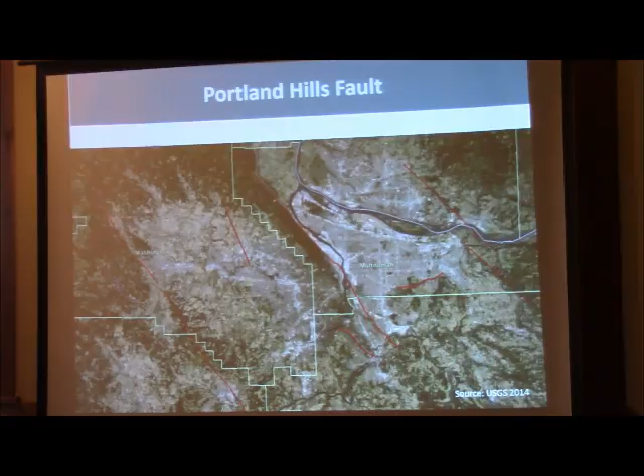But the Cascadia subduction zone earthquake is not the only seismic risk we have here in Portland. Of equal concern to me is the Portland Hills Fault, because it's directly underneath the city center. And while it can't produce a large quake like a magnitude 9, the damage associated with it, because of its proximity to the city center, could be as damaging, if not more, than the Cascadia subduction zone.

So why do we care about unreinforced masonry buildings? Primarily because these buildings were never intended to withstand seismic shaking. They lack the structural connections that enable them to stand up.

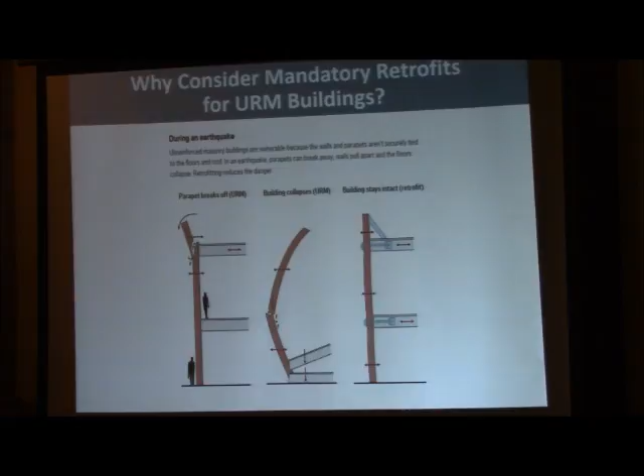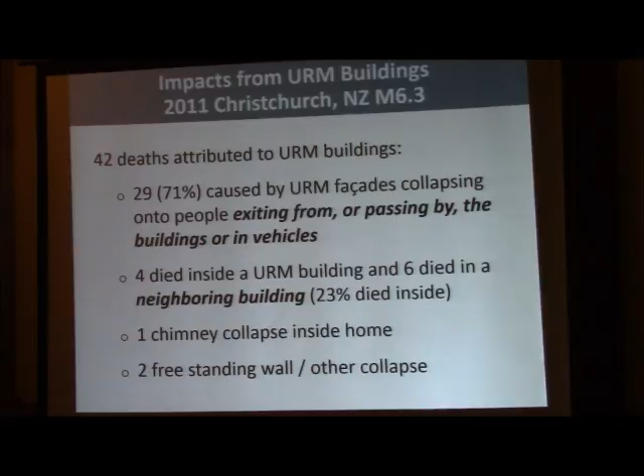In Christchurch, 185 people died as a result of their 6.3 magnitude earthquake back in 2011. But what's really interesting is that of those deaths, 42 were a direct result of unreinforced masonry buildings failing in some way. Of particular note, it was the people outside the building that had more of a chance of dying than the people inside. So 71% of the people who died by URMs were outside the building.

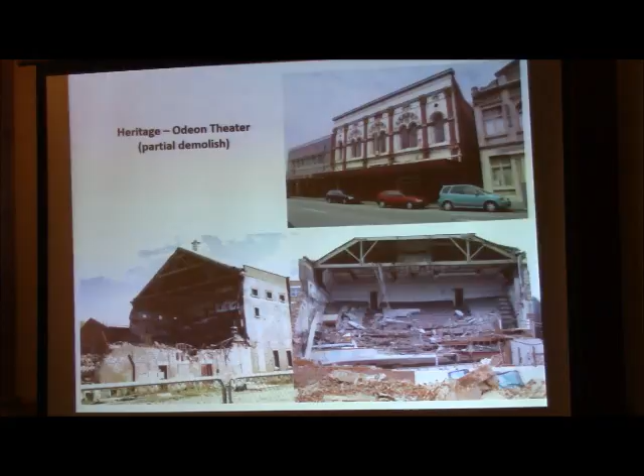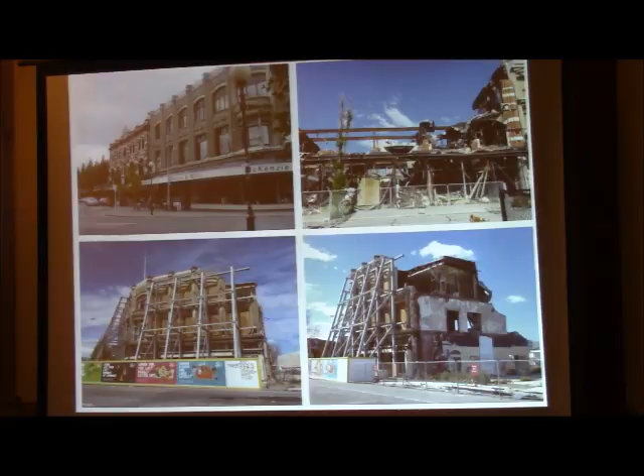This is the Odeon Theater. This is McKenzie and Willis, a large interior design furniture store. You can see this red building actually caught fire after the earthquake. But because the facade was a very grand, ornate facade, they put up this massive scaffolding to brace it against any further damage from subsequent aftershocks.

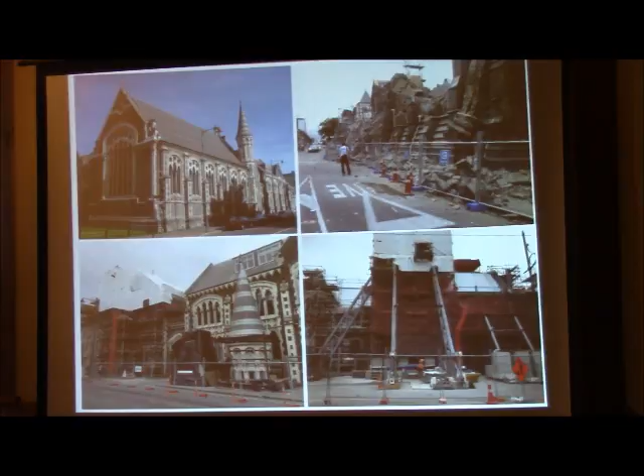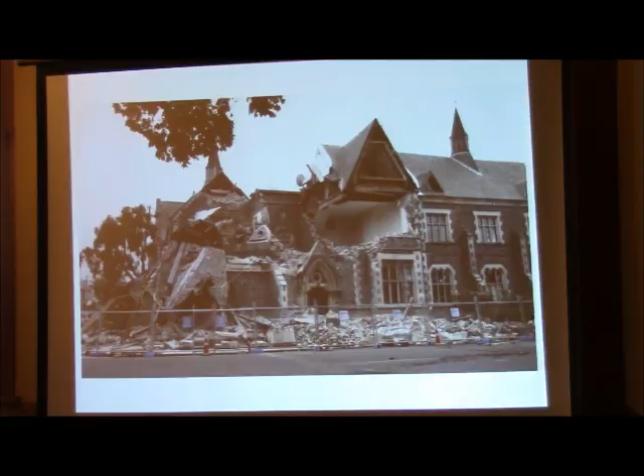This is at the other end of the Art Center of Christchurch. I often use this photo to showcase why you do not run out of a building when the ground is shaking. Notice that the people inside the building would have been just fine—it's the people outside that would have sustained significant damage or injury.

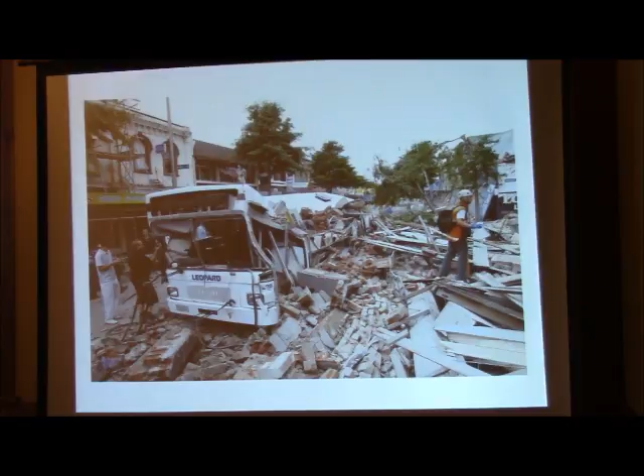This is Colombo Street, a major thoroughfare, kind of like Burnside in Portland. You can see it's literally storefront after storefront of these unreinforced masonry buildings. Imagine trying to get a TriMet bus, an ambulance, a fire truck down this road—it would be practically impossible without clearing the debris first.

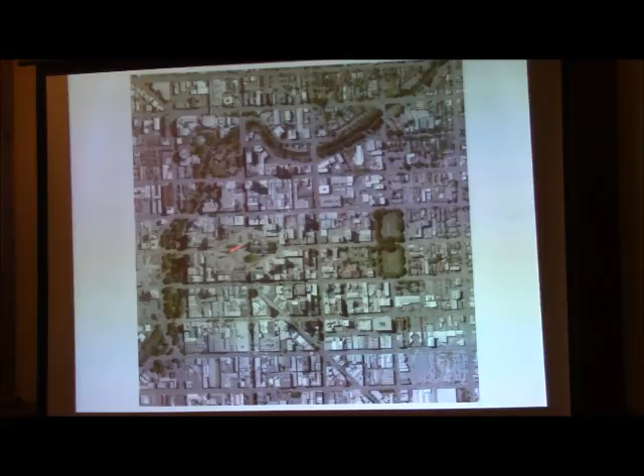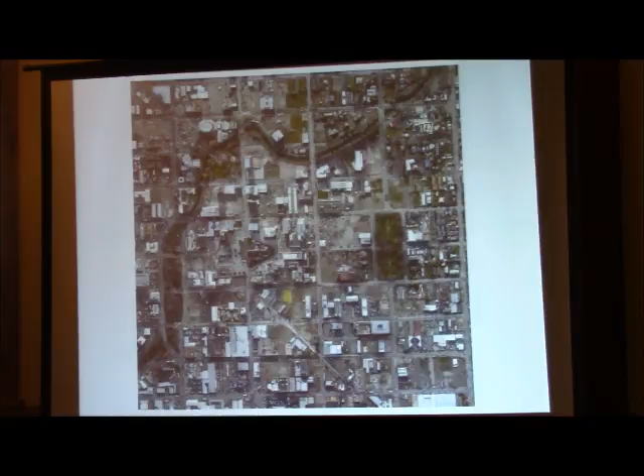So here's before and after, and then one more, and then here's the Christchurch Cathedral, and then after. The problem is that these weren't all unreinforced masonry buildings—the problem is these buildings sustained such heavy damage they had to be demolished anyway.

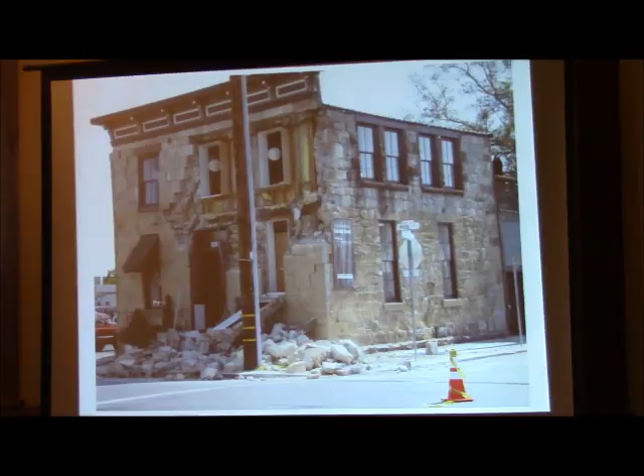So just some more building damage. This is from the Nisqually earthquake in Seattle in 2001. Here's the Napa earthquake in 2014—this is a wine tasting room. And then Oklahoma now has the distinction of being the most seismically active state in the country. This was after their 5.6 quake earlier last year.

But it's not just seismic risk that makes these buildings vulnerable. You might remember we had a pretty significant windstorm back in December of 2014.

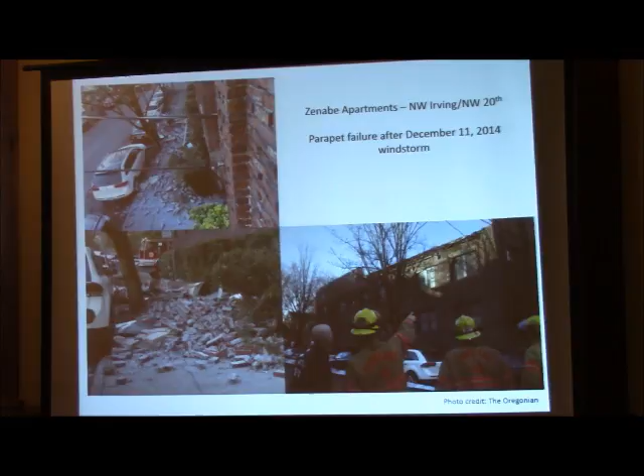This is the Zenabe Apartments in the Alphabet District. You can see here the entire parapet came crashing down, thankfully injuring no one, but it did do some damage to the sidewalk and cars parked nearby.

Other predominantly California cities that have unreinforced masonry buildings have already passed mandatory retrofit laws—some of the bigger ones being Los Angeles, Berkeley, and San Francisco. So in 2014, City Council directed my bureau, Emergency Management, to work with the Bureau of Development Services and the Portland Development Commission to introduce policies to mitigate the risk posed by these buildings.

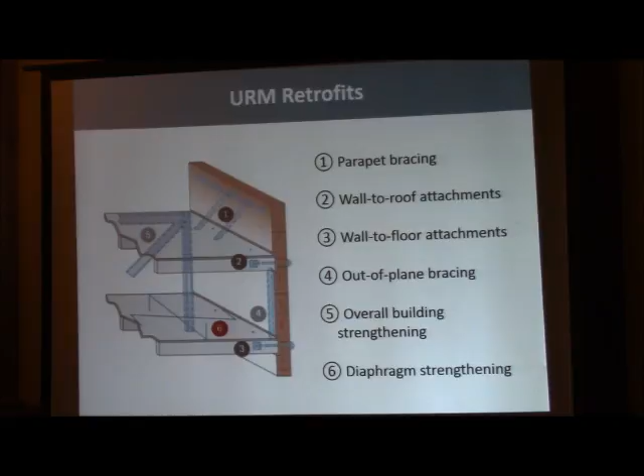And it is possible to retrofit these buildings. You can do very simple things like brace the parapet, tie the wall to the roof, and the wall to the floors. Here we see examples of retrofitted unreinforced masonry buildings.

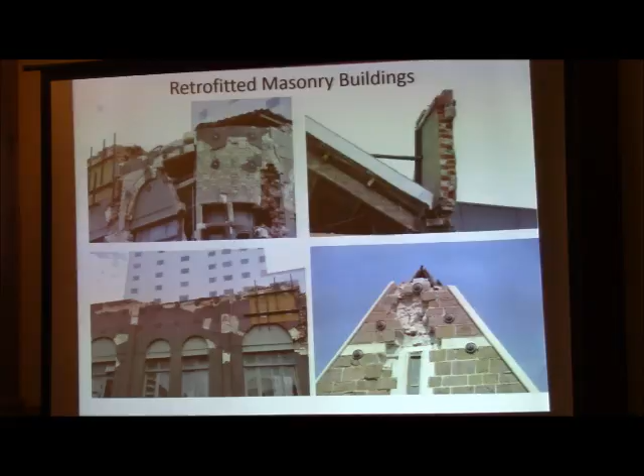These little rosettes are usually telltale signs that the walls have been anchored. You can see here the buildings still sustained some damage, but they did not collapse. When these buildings are retrofitted to almost new building standards, they actually perform quite well.

In fact, these two are electrical substations. Here's a historic church, and that's a historic society. The problem with this external bracing is that it would never pass muster with our historic preservation office, so these kinds of retrofits would not be possible in Oregon.

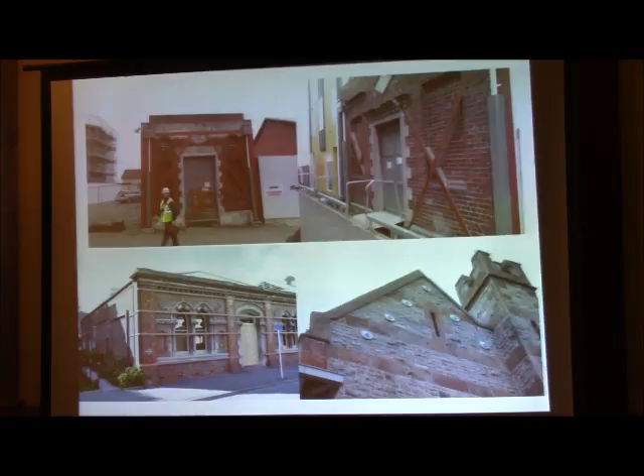Okay, I'm going to go quickly through this part. The first thing we wanted to do was get a handle on the citywide risk. We were using a roughly 30-year-old database done by PSU engineering students through a windshield survey, so we wanted to make sure it was still accurate. We hired an engineer, put them at the Bureau of Development Services, and for over a year worked to update the inventory.

It turns out the database was actually quite accurate. We started off with about 1,866 buildings; 101 were falsely identified, and then we added some we didn't catch the first time. So the entire universe of these buildings is about 1,884. But since that time, 154 have been demolished, and fewer than 280 have had either a partial or full upgrade. At this rate, it would take another 75 to 100 years before we really solved our unreinforced masonry building problem.

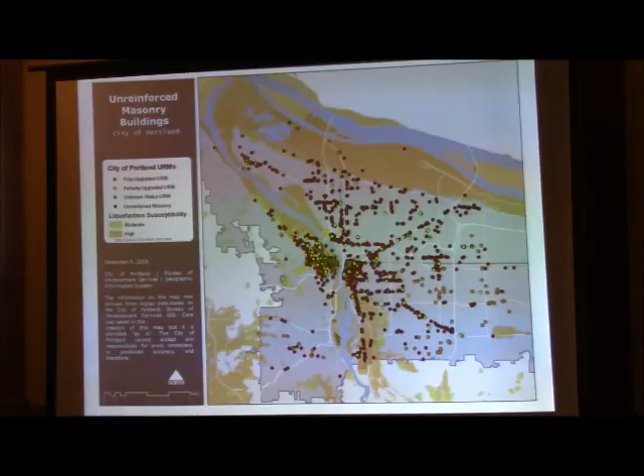Where are these buildings located? They're really all over the city—obviously primarily concentrated in downtown, Old Town, and Chinatown, but they're also all along our major transportation routes: Burnside, Powell, Sandy, Foster. If you think about how the city developed along the streetcar lines, it makes sense. As an emergency planner, what this tells me is that we're going to have a lot of debris to clear from our streets before we can get ambulances and fire trucks back on the road.

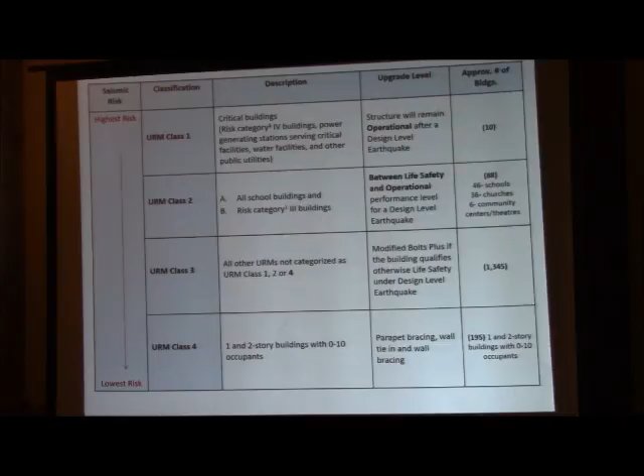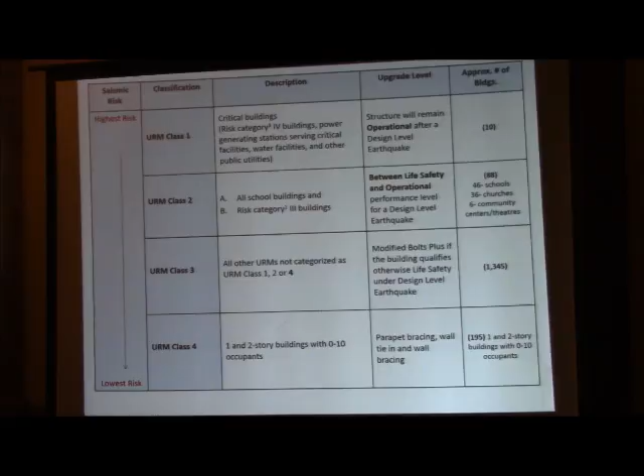At the very top end of the scale, your Class 1 critical facilities, we want an operational performance standard. At the very bottom of the classification, your 1- or 2-story, very low occupancy buildings, we said let's do the bare minimum: brace the parapets and tie the wall to the floor. You'll see here that the majority of the buildings are Class 3.

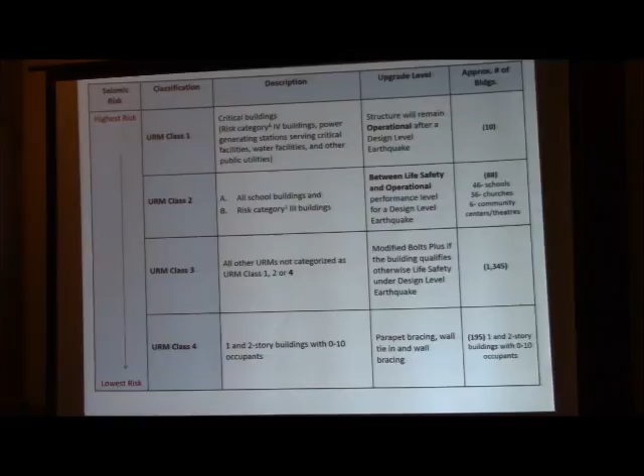For this performance standard, we're using what's called a modified Bolts Plus. It's a standard that was actually developed in San Francisco, and it's a little bit short of life safety, but it's, I think, the best we can do for now.

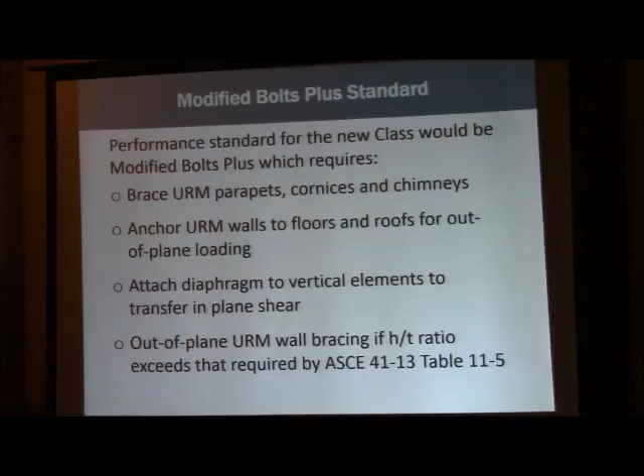We assigned a timeline for these retrofits. For step 1, all buildings have to have an ASCE 41 assessment done, in most cases within 3 to 5 years. Then we wanted intermediate milestones, so within 10 years you have to brace the parapets and tie the wall to the floor, and then in some cases you've got 25, potentially up to 30 years to do the full seismic retrofit.

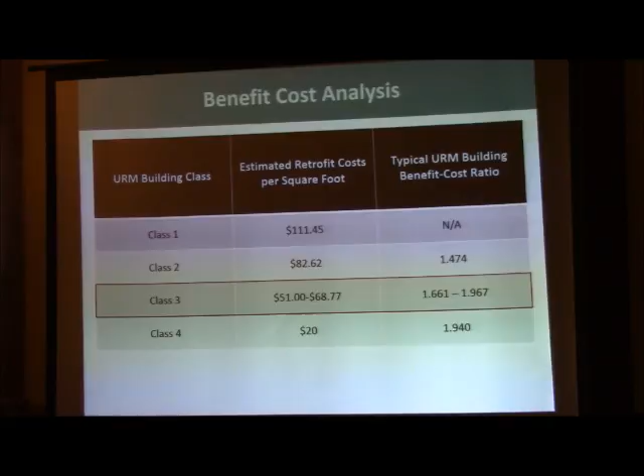We hired a nationally recognized expert to do a benefit-cost analysis for us, and the BCA ratio was actually quite good. Life safety, of course, is the predominant reason, and for every dollar you spend, you're going to get close to $2 in savings afterward.

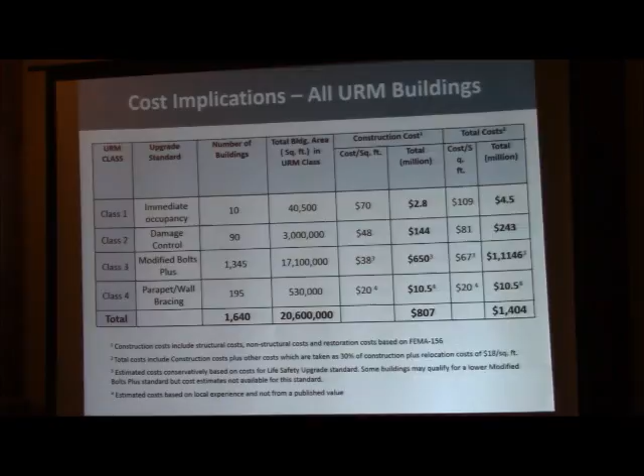I'm going quickly because I think I'm almost over my time. These retrofits are not cheap, and cost has certainly been the biggest concern we've heard from property owners. If we were to do the retrofits for all 1,640 buildings remaining, it'd be in the neighborhood of about $1.4 billion—not an insignificant amount of money. And of course, the city is also an owner of some of these buildings, including the Parks Bureau.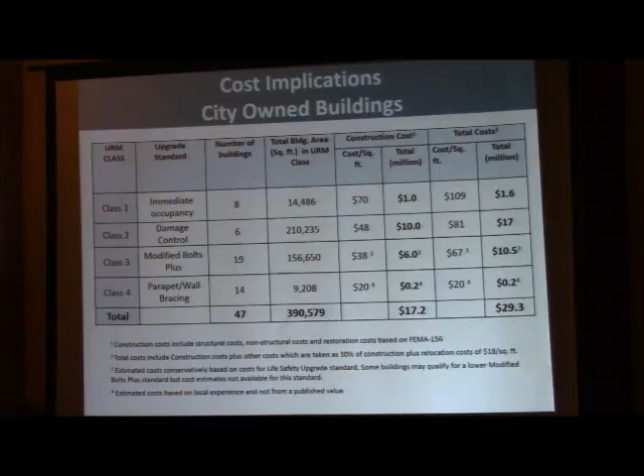So we are obviously going to have to do our own seismic retrofit work.

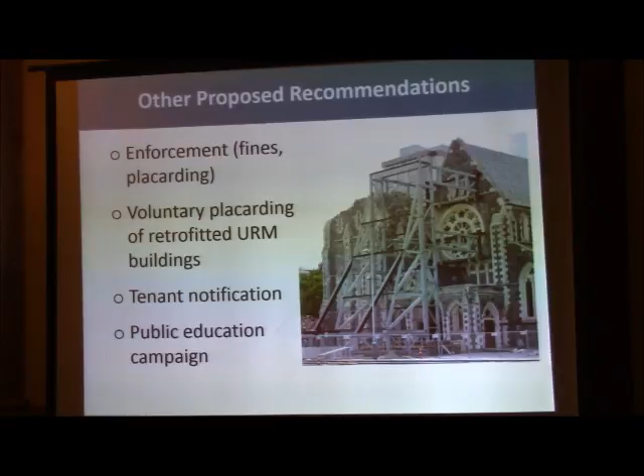Some final parting thoughts to wrap up. We're wrapping up the work of the policy committee, and we hope to have recommendations to council by later this year. In addition to a recommendation to adopt a mandatory retrofit policy, we're also going to make recommendations regarding enforcement, primarily through fines and placarding, and then requiring tenant notification. So that's it for me. I'll turn it over to, I think, Richard.

Okay, I'm going to try hard not to be terribly redundant here with what everyone else is going to say, and give you sort of a case study of what we did and why we did it with respect to the new high school that's part of our $680 million construction bond program.

So first, of course, you've heard a little bit, and you probably know a lot about the Oregon Resilience Plan. You're going to hear more about that in a later presentation on another night. But this was sort of our call to action. I attended a couple of presentations given by members of the task group that put together the Oregon Resilience Plan. About the time we were finalizing the content of our $680 million bond program, we began to connect some dots about opportunities and perhaps responsibilities that we should consider as we move forward in executing some of the very significant projects in that program.

You know about this stuff, I'll skip that. This I think is really interesting, which you probably may have seen before, but that's the work that Chris Goldfinger did, categorizing and cataloging really the earthquake history over the past 10,000 years from the Cascadia subduction zone earthquake. These big bars represent 9.0 earthquakes, and the smaller ones are 8.0. And altogether, he said there have been 41 in the last 10,000 years that were bigger than 8.0, and 19 greater than 9.0.

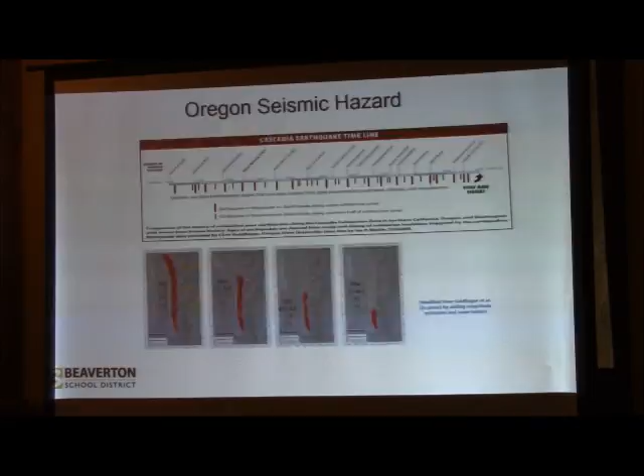This is kind of a graph that talks about what resilience means. A lot of people don't really know, so what is resilience all about? I think the best definition I've heard of resilience is being able to take a punch and get up, recover, and move forward. This chart is trying to illustrate that when some disaster occurs, you lose a lot of functionality and it takes a while to recover, and you recover hopefully better than you were before.

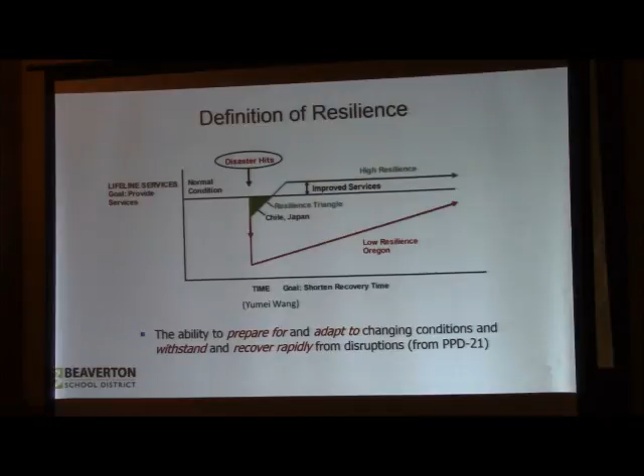But we're very ill prepared, as you heard Carmen talk about, partly because we haven't had a lot of earthquakes. Our old masonry buildings haven't fallen down like they have in California, where they've had enough earthquakes that the old ones, not reinforced, already fell down. They haven't here, so our recovery time is likely to be much, much longer than in other places.

Some of the interesting findings in the Oregon Resilience Plan, one of the key things, this is a kind of faded map of Washington and Oregon. The fuel recovery, it turns out the linchpin for recovery in Oregon after this is going to be the availability of liquid fuels. Because without that, we can't run the construction equipment to clear the roads, to repair the water lines, to get transportation, and almost all the fuel comes down in pipelines from Washington. We don't have any refineries here. It goes to a fuel depot on the Columbia River, and sits in tanks on liquefiable soils, which will probably be in the river on fire after the earthquake. So there'll be no fuel in Oregon, which is a problem.

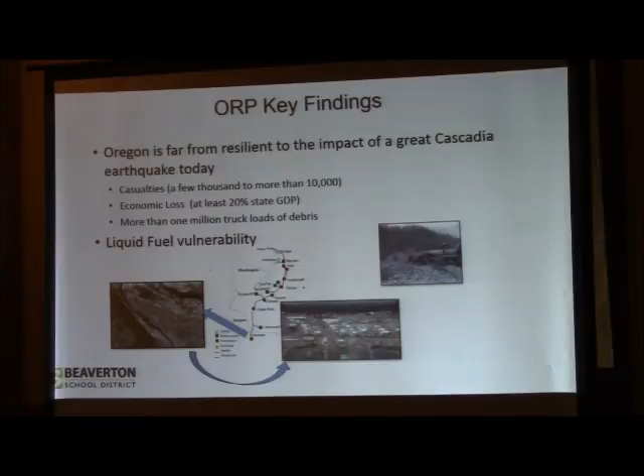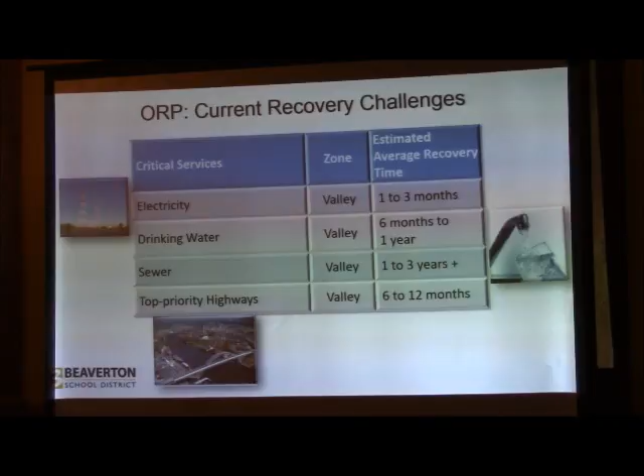Some of the other sobering statistics in terms of recovery time, you can see them here. Really long periods of time on average to recover basic public services and utilities.

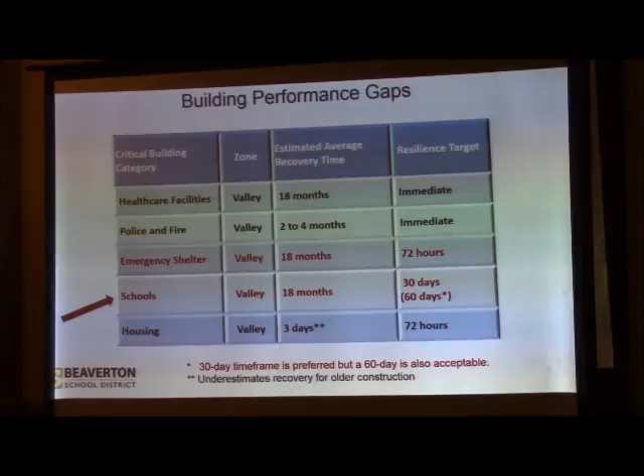Huge challenge. So recovery time for key things like emergency shelters and, oh yeah, schools. The target in the Oregon Resilience Plan would be 72 hours for an emergency shelter, 3 days, 30 or 60 days for schools. But this is what they think the average recovery time will actually be. Can you imagine that? 18 months, no schools.

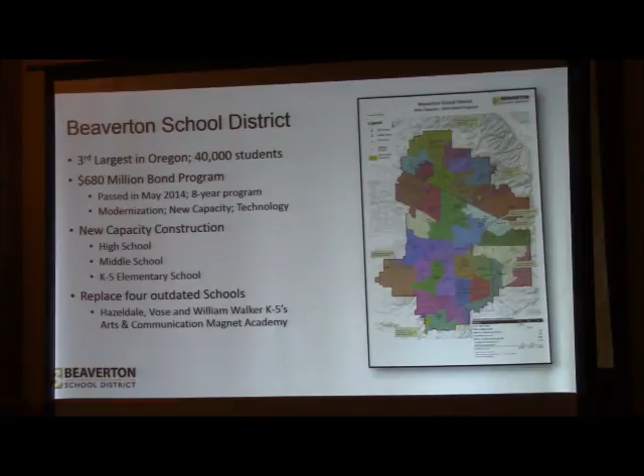So this is Beaverton School District. You heard a lot about that already. So I'm going to skip that and go to this.

Okay, so all of this is gelling in our minds as we're beginning the planning and budgeting for our bond program, but we recognize there's an opportunity here to perhaps shape slightly differently what we do in the design of the new buildings, because we're going to be putting in 7 new school buildings as part of this bond program. And 3 of them are for new capacity because we're growing.

Middle school, by the way, is done. High school has got to be done by September of this year. I'm going to have several hundred kids on my doorstep. That's not going to be good. And we will be finishing this school also up in North Bethany.

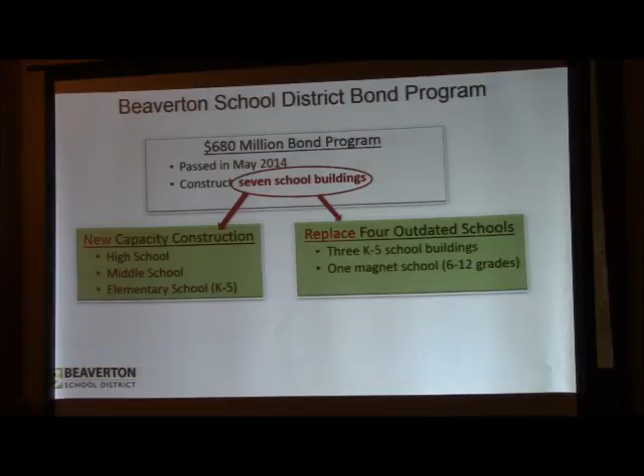We're also doing 4 teardowns and rebuilds. So that's where the 7 comes from. 3 are for new capacity, and we actually chose to tear down and totally replace 4 schools. So that's 7 new school buildings, a huge opportunity. And we have $100 million of repairs and classroom technology and other things in this bond program. So we were connecting the dots here.

Huge challenge, huge responsibility perhaps with this opportunity to build 7 new schools. To what standards should we build them? The Oregon Resilience Plan, as we saw it, was a call to action to do something, but it's not design criteria that I could give to our structural engineers and architects regarding how to design the building.

So the other thing that happens when there's a disaster: where do people go? Across the world, whether it's an earthquake, a major storm, or some other kind of disaster, they tend to go to schools, right? You see that all over the world. It's a gathering place. And that's the other dot we connected: if people don't have fuel, they can't drive around because the roads are out, bridges are down. Schools are different than other public facilities because they're scattered around in neighborhoods, and most people, if they can't live in their home, can probably walk to their neighborhood school.

So we saw an opportunity not only to design the buildings with more resiliency in them, but also to consider what we might do in the design of those buildings so that they could serve temporarily as a community shelter after the event. That took a little bit of different thinking than just what we do structurally.

So we put together a group of stakeholders, including emergency response organizations, our lifeline service providers, our staff, as well as our design teams, because we had such a capacity crunch, we started with the high school and the middle school. We awarded those design contracts a couple, 3 months after the bond measure passed. We were moving pretty quickly, and they were already under contract when we did this.

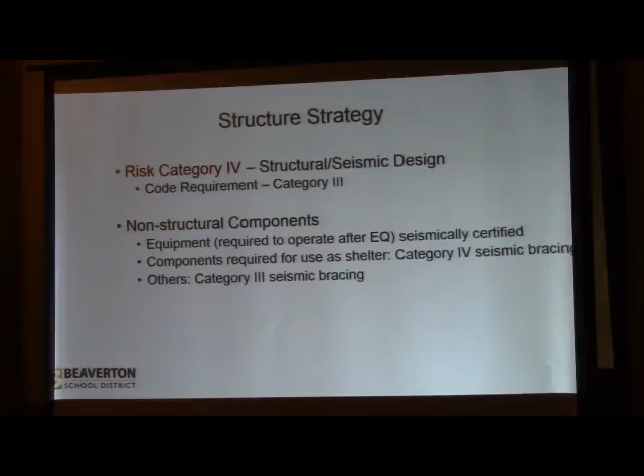Our strategy for the structure: you already heard that schools by code are supposed to be category 3 buildings at least. We chose to design the structure to category 4, the same as emergency response facilities, fire facilities, and so forth. The rest is category 3 with some exemptions. Some non-structural components supporting community resiliency, like certain pipelines and building plumbing, were also designed to a higher standard.

Power, so we thought about what about power. If the buildings are going to serve as an emergency shelter, we're going to need to think about power. We decided to upsize the generators. Instead of just having generating capacity for emergency egress and emergency power requirements, we increased that. So we've got a 450 kW generator with 96 hours of fuel. That's not a ton, but it's something, and at some point we're going to need somebody to get fuel out there to continue that.

However, we're also installing solar PV systems on each of the new schools. That's a state requirement, by the way, to have some green technology—for us, it's solar. Our design team is having a little challenge with the city of Beaverton now about our design, because they've never seen this before and don't quite know how to permit it. But they figured out how to design this so the PV system can actually feed the building through the generator panel when we lose PGE power, stretching the fuel supply if the sun happens to be out. We're still working through the permitting on that.

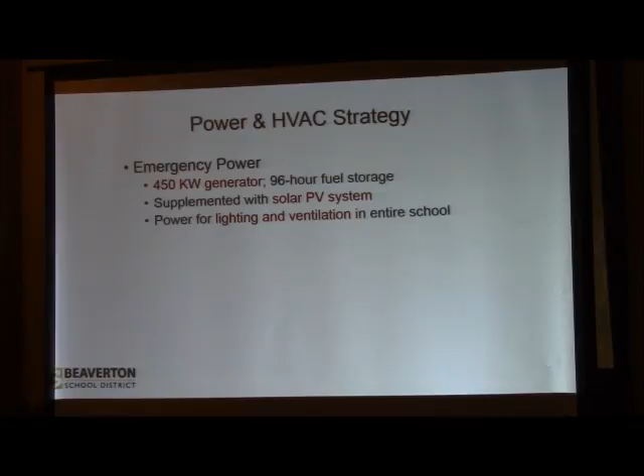So we'll have power for lighting and ventilation, but not heating and cooling. We figured that was probably a reasonable compromise. The other thing we did about emergency power is we wired the building at almost no extra cost, thinking about what parts of the school would be used as an emergency shelter. The commons, cafeteria, kitchen, gyms, and big gathering spaces are wired separately, so we can power those parts of the building independent of the classrooms, which we don't need powered to support that.

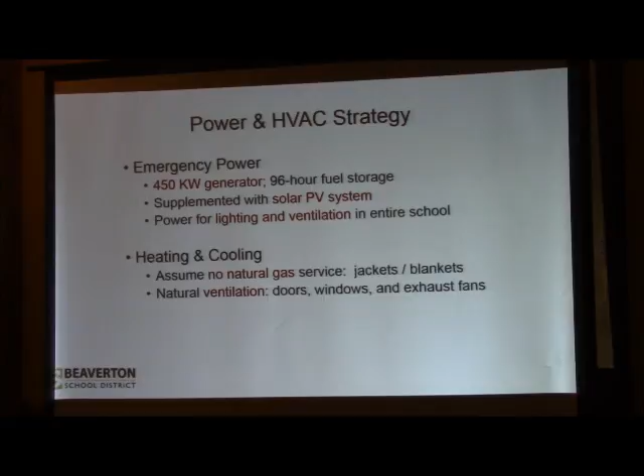Heating and cooling, okay, water—on-site, that's all we can do. We used restrained pipes for all the water and wastewater plumbing. We hope the backbone systems from Tualatin Valley Water, City of Beaverton, and Clean Water Services catch up with all of that. We also thought about how to provide water in an emergency shelter. We considered storing water on site, but that was too hard, too expensive, too much space, and perishable. So instead, we plumbed the common parts of the building—the kitchen, cafeteria, and locker room—separately, and provided stub-out connections outside the building so that if a water truck could get there, it can pump water into those parts of the building. We just had to think through that. It didn't cost much more to do it that way.

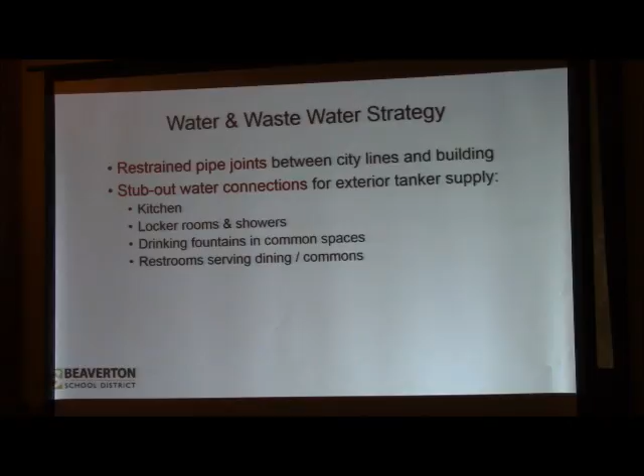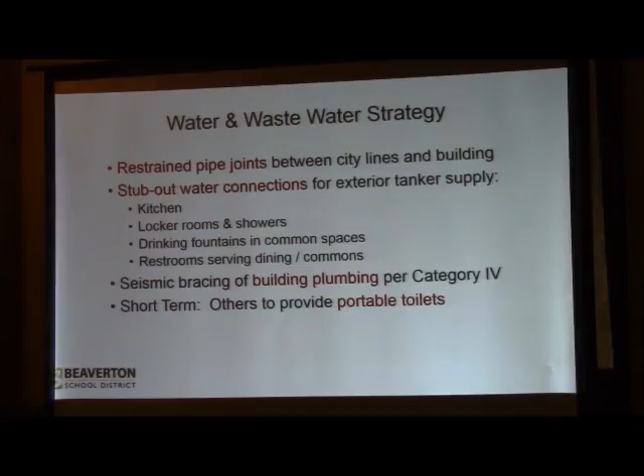Seismic plumbing, short-term work. Sewage is a problem—we're going to need somebody to bring portable toilets, probably, to make that work. We assume natural gas will be disrupted; we thought about an alternate fuel supply but didn't do that. This is really important: if you haven't done this at your home, I haven't either, but we all should install an automatic seismic shutoff valve on the natural gas supply if you have gas service, because the last thing you want is a natural gas fed fire in a building after the earthquake. The great San Francisco earthquake of 1906 was first really called the 1906 fire in San Francisco—the city burned down after the fire started because there was no water in the fire mains. So in case there's an ignition source, we don't want to feed it with natural gas while there may be difficulty fighting fires.

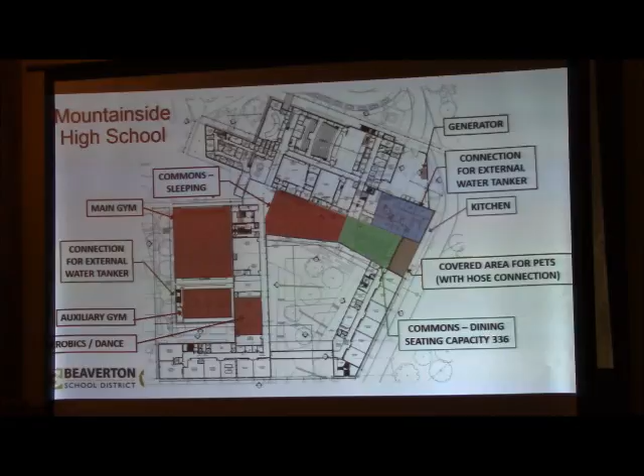So what did all this cost? Here's a quick summary. These were based on cost estimates; we didn't do any actual auditing of after-the-fact costs. But basically, the bottom line is all those things we did added about $1 million, we think, to the cost of the building—1% of the cost of the building, pretty cheap.

We wanted to do this for a couple of reasons. One is we're not a developer—nothing wrong with developers—but we're not going to build the school and sell it off in two years. We're going to have this building for probably 100 years. And when you think about the probability of this earthquake happening within the lifetime of this building, it's scary high. So it seemed to us, just from an economic perspective, a really cheap insurance policy to be sure the building not only survives the earthquake but with minimal damage, and could probably serve as a shelter, which was the second reason we did all this.

Thanks. Is it me next? Yes? Yes. Okay.

I'm decidedly low tech—not because I'm representing City Club, but City Club has just begun its advocacy effort for our report, and they said they didn't have a PowerPoint presentation ready for me, and that's okay. I hope it's okay with you. I did bring, and there are many still out there, these hard copies of the summary of our recommendations. There's also a website where you can get the entire 80-page report with lots of references online, if you want to look at it.

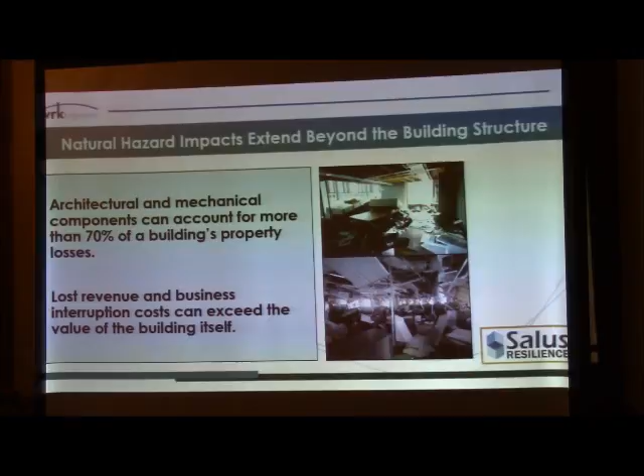USRC uses a couple of different methodologies to try to capture that damage, as well as the loss-of-use time - how long it's going to take to get back into the building - and also how much it's going to cost to actually repair that. That comes through these two documents: this relatively new document, the Seismic Performance Assessment of Buildings, FEMA P-58, put together over essentially a 10-year period with over $10 million spent, primarily by FEMA, putting that document together.

It's a risk-based assessment tool, different from this tool you see here on the right, the Seismic Evaluation of Existing Buildings. This is ASCE 41-13, which is referenced in the URM provisions that the City of Portland is putting together. These are two methodologies that get to the same answer a little bit differently. FEMA P-58 is cutting edge in terms of methodology, and ASCE 41-13 can be used and translated into some of the ratings.

But just really quickly, the reason why ratings might be of relevance to building owners or other entities interested in buildings: How safe are the buildings after the earthquake? What needs to be repaired? What's the cost? How long is it going to take to get back in?

Those are really the questions that matter if I'm trying to prioritize, or if I'm trying to understand post-earthquake response planning. If I'm a business owner and I make widgets, I need to know how bad my building's going to be damaged and how long I'm going to be out, so I can't make widgets anymore until I can make widgets again. How much that's going to cost me to fix my building, to fix my equipment, and also what are my opportunities for loss of income just due to loss of market share.

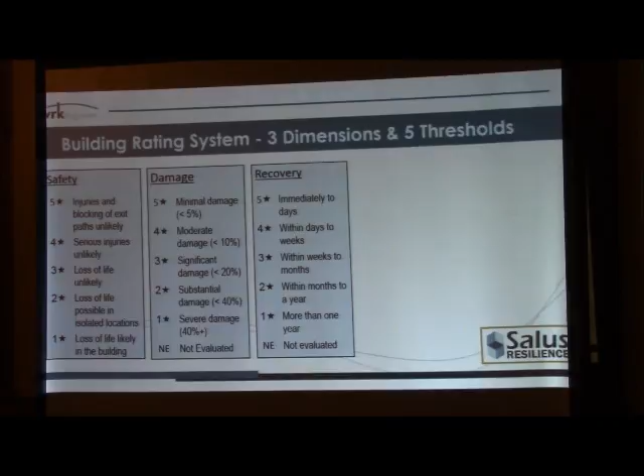But you can go down, and as you go down the scale, things get more dire. The cost of fixing the structural damage, or structural and non-structural, goes up higher, and the recovery time increases as well.

USRC has a rating system similar to what you might see with LEED, and I'm sure everybody's familiar with that. The lowest level is called bronze, and bronze is a 3-star rating, so loss of life is unlikely. This is probably pretty close to a life safety type approach. But you're going to have less than 40% damage, and you may not be able to get back in your building for 6 months to a year.

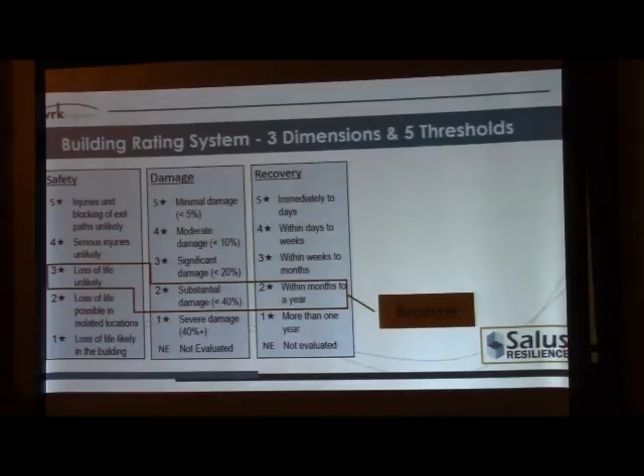I know that FEMA sets thresholds for buildings eligible for federal funds, like public buildings. FEMA sets a threshold of 40% replacement cost - if the damage exceeds 40% replacement cost, they're going to tear that building down, they're not going to let you fix it. So this 40% threshold is a really important number that people want to try and stay under.

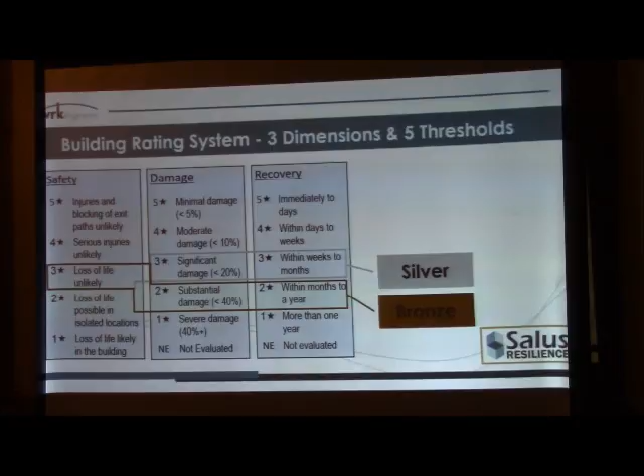The next category up is silver. Again, this isn't necessarily an improvement in the safety aspect - you're still at loss of life unlikely - but significant damage less than 20%. You're probably looking at weeks to months, so here you might be in the 8 weeks to 6 months range.

The next level up is gold, which is probably closer to a risk category 3 type building, where serious injuries are unlikely, lower damage percentage, and faster time to reoccupy. And then the highest is platinum. It's no coincidence that these kind of line up with the LEED rating system.

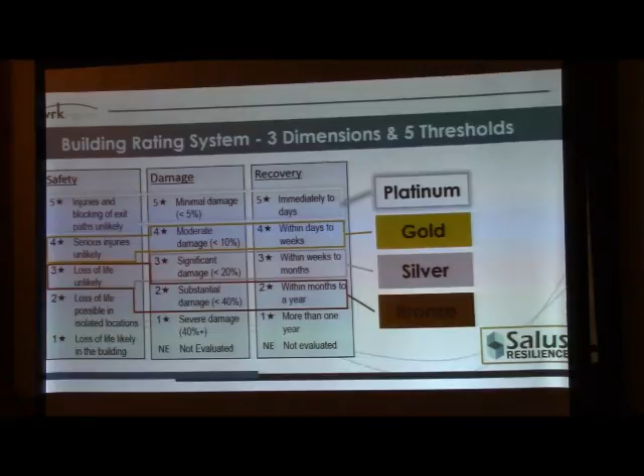The same colors, or the same metals anyways. And this one is the highest level. This platinum is extremely difficult to get to, and you have to go beyond code, beyond even risk category 4 to get to the platinum level.

But here's a graphical representation of what these kinds of buildings might look like. So platinum, gold here. This is an operational type depiction, maybe silver here, this is a risk category 3 building, what a school would normally be as a silver, a risk category 3. Down here, bronze is life safety, and this is what a normal code level building would get. Everybody walks out, nobody dies, hopefully. But the building might be, as mentioned before, a complete throwaway.

And that could be any building, whether it's built in 2017 or 1994. I know Dick had a slide where he talked about the majority of the school building stock in Oregon being built pre-1974. And if you go back and look at the codes, the code level seismic forces have increased from '74 to now about 6-fold. Back in '74, when the first seismic code came in Oregon, you designed for about 3% of lateral load. Now you're up at anywhere, depending on your system, maybe up to 15% of lateral load.

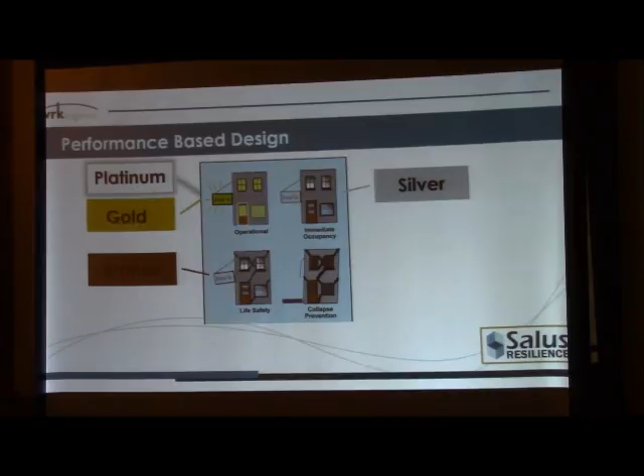So you have significant amounts. Right out of the chute, if you have an old building that's never been touched, you've got no chance, you're probably in collapse prevention or even less than that. And unfortunately, we have a lot of building stock that's there.

The value of the ratings, as I mentioned before, is business continuity planning. USRC can help us with the safety aspect of it. How do I come up with, I think somebody mentioned, an evacuation plan? How do I know how to respond to my building if I don't really know where the damage is going to be? If I have a better understanding of where my damage is going to be or how my building is going to perform, I can have a better opportunity to put together an evacuation plan that will actually work when the earthquake happens.

And damage, how much cash do we need to repair it? A lot of developers and building owners in Portland tell me, well, I've got earthquake insurance, so big deal, right? And I talked to one developer who has over 400 properties here in Portland, and they're like, yeah, we have earthquake insurance, we won't worry about it. But there's a significant amount of dollars. There's usually this premium, those deductibles are about 20% of the value of your property as far as damage. You're responsible for the first 20%. That can be a pretty big number, especially if you have a commercial property, even if you only have one, that can still be a pretty good number. So understanding your damage levels and repair costs is important as well.

And then also the operation time and recovery. We talked about that, if I'm making widgets. If maybe you're just a renter, a tenant in an office space, you want to know, hey, is the building we're moving into safe? Are my employees going to be safe? There's a building downtown Portland right now that has tiles popping off that I'm not really sure about. I'm sure that building's very safe, but those are the types of things in an earthquake that we might take for granted if we're just leasing an office space, and we would want to know that.

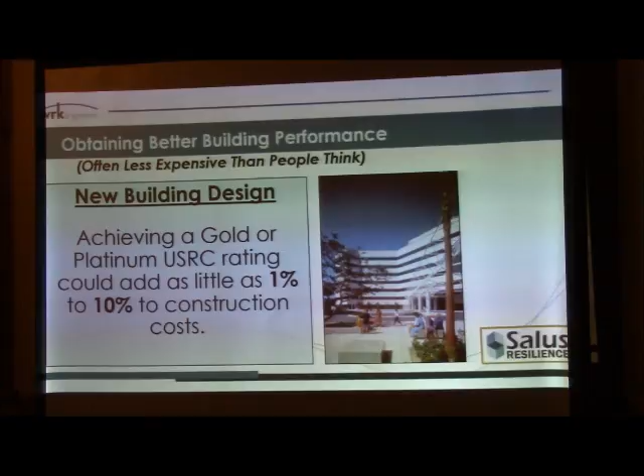The ability to achieve these higher ratings, depending on the size of the project and the system you choose—concrete, steel, wood, 1 story, 10 stories, 50 stories—generally isn't going to mean huge extra costs. Even if it's a 10% cost to raise my building to a platinum level, I'd expect only 5% damage. If I spend that extra 10% and the earthquake happens, I'm only spending 5% to fix my building, versus paying 20% after the earthquake if I spend nothing. So it's present dollars spent now to save future dollars—I'm buying insurance, in that sense. That's a good decision.

I'll plagiarize Dick's quotes here—that's his slide, he didn't know I took it. Mountainside School is just an example, nothing new here. Same slide, but it's 1% of cost for the high school, and similar numbers for middle school and K-5 elementary schools, less than 2%. These are not big dollars we're spending, and in terms of the benefit it provides, to me it's a no-brainer. Some of this stuff is a complete no-brainer.

Let's talk about insurance really quick. Insurance can be expensive, or in some places it's not even available. But as I mentioned, repair costs likely go down. If you elevate your building to a gold or platinum level and spend that extra 5-10% to do that, you may choose to simply remove earthquake insurance. You save those premium dollars you'd spend every year, spend that now to upgrade your building instead, and become self-insured for earthquakes. Knowing your building will perform at a higher level, you won't have to outlay as much cash, and you take those premium dollars and put them in the bank.

And the longer that timeline goes—whether the earthquake happens 10, 20, 30 years from now—that kind of pension or annuity you've built up for replacing things easily covers the cost of upgrading.

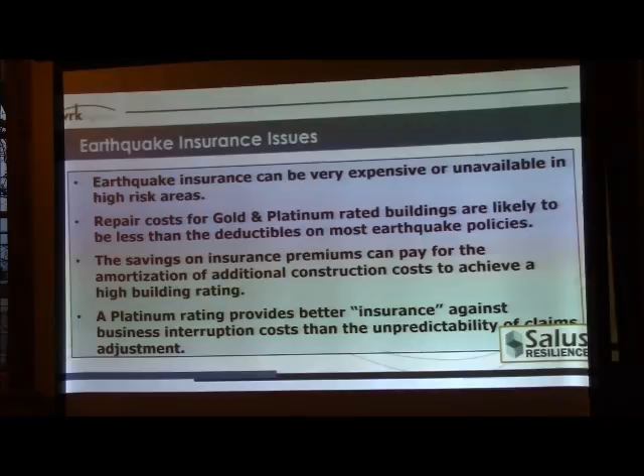Lastly, using USRC to become resilient—I've put together some really simplistic bullet points. The first part is just about planning, and it really comes down to timelines. If I want a resiliency plan or strategy, I need to understand my time frame goals. If I'm pumping out widgets and my goal is to be operational in 3 weeks, my resiliency plan looks very different than if my goal is to become operational in 6 months.

I have to draw a line in the sand and pick some time I want to achieve. If my goal is to be operational in 3 days or 3 hours, my resiliency strategy or plan might look very different. A lot of it comes around how quickly we want to be back in these facilities. The school district has said 30 days—that's what the Oregon Resiliency Plan has, 30 days back in basic operation.

The next piece is to assess what your inventory is, assess what your buildings will do. You have to have information, bring it together and synthesize it, and then start to prioritize—based on your timelines and objectives—what mitigation aspects to pursue. Maybe that's strengthening, maybe tearing down and replacing schools as we grow, or putting in bracing and re-roofing with plywood when I re-roof, building it into my plan over the next 20, 30, 40, 50 years. At least I have an idea of what I need to do, and I can prioritize based on the ratings I get.